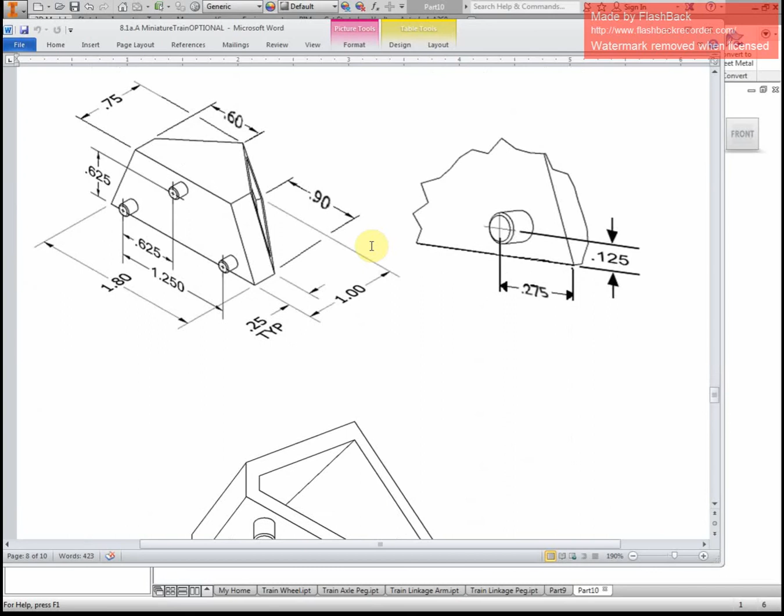Today I'm going to show you how to build the cow catcher for the miniature train. This one, notice there's 5 pictures with this. There's a lot going on, a lot of different dimensions, and sometimes I have to scroll from one picture to another just to figure out one general shape and find all of its dimensions.

Every so often they'll say something like this, 0.25 typical. That just means it's the same on both sides. Everything that looks like it's right there is right there, or anything that looks like it's 0.25 is the 0.25. Same thing down here, 0.10 typical. That means all of it all the way around is a tenth of an inch thick.

Diameter of 0.125, that's for this peg. Typical, but that means it's just the same for all 3 pegs.

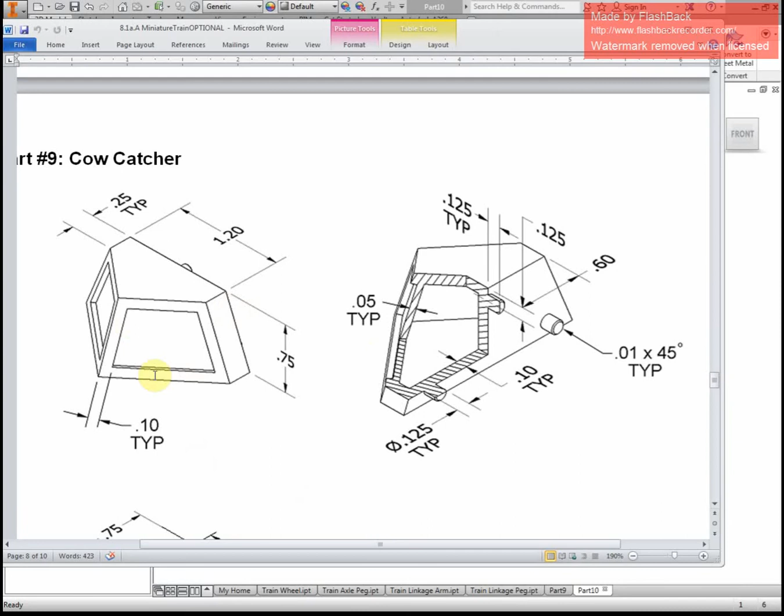The order you do the pieces here is important. So I'm going to build the overall shape first, then I'm going to shell it because I know it's hollow, and I'm going to delete the bottom face. After I do that, I'm going to put cutouts on the front on both those little sides, and then I'm going to put the pegs on the back.

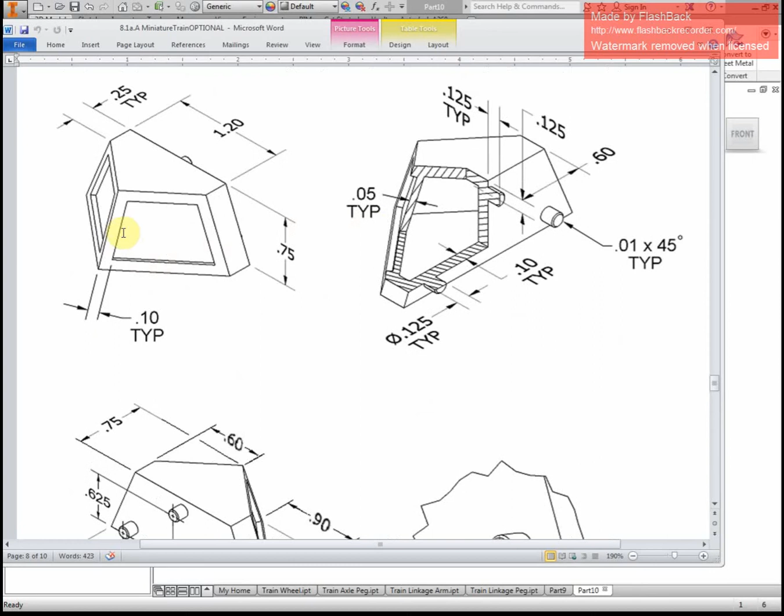If I do these little cutouts before I shell it, then I end up having those little cutouts pushed in right here when I shell. It ends up looking kind of funny. So make sure you shell it, then put these cutouts on.

Alright, let's get started. This one's going to take some time. So I'm going to start a sketch on this surface. I'm going to do my bottom piece first.

I'm going to go and do this larger bottom because the bottom and the top are different dimensions, though the backs are flat. So I'm going to do my bottom first, then I'm going to come and do my top using an offset work plane.

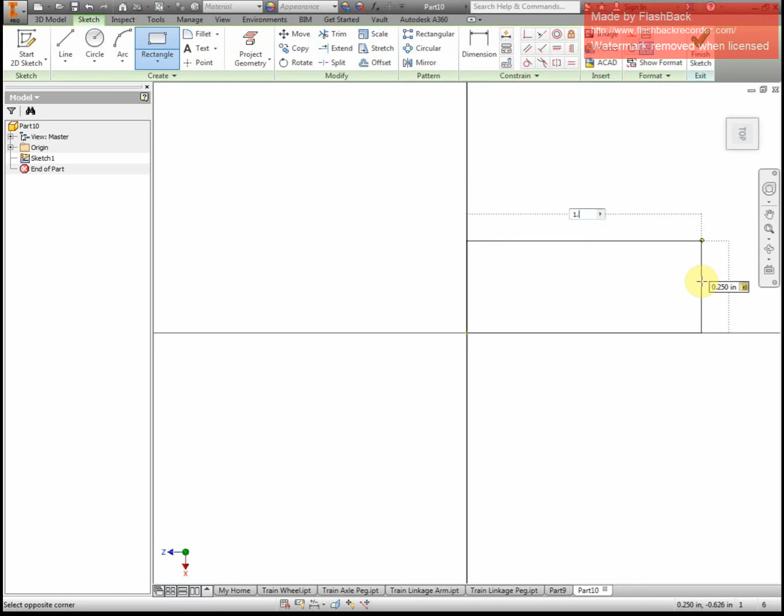My bottom, I've started a sketch already. I have to do a rectangle, do from here over. It is, with just the rectangle part, 0.25 by 1.80. Alright, so I have that piece.

From there I use lines and I come just kind of out. I'm just going to do a general shape, then dimension it so that it's the correct size from front to back. This piece here, make sure you're careful about what 2 things you're dimensioning between. So I'm only going from my peak back to my little rectangle piece here, and that one ends up being 0.75.

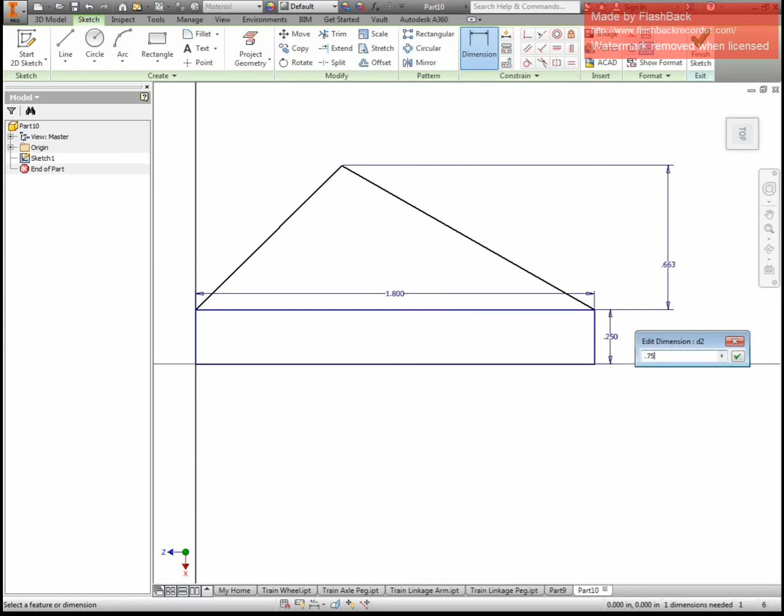So be careful how you build this. Make sure everything is dimensioned according to how you are doing it. You might do it differently than me, and that's fine. Just make sure your dimensions are coming in correct. Otherwise you end up with some weird stuff and you end up not being able to do those cutouts on the front. And this should be 0.9 because it's in the middle.

Alright, so this sketch, this one here, is done. I'm facing the wrong way, but that's not a big deal. So now I'm going to have to do an offset plane, and I can't see any planes. I don't have any shapes yet.

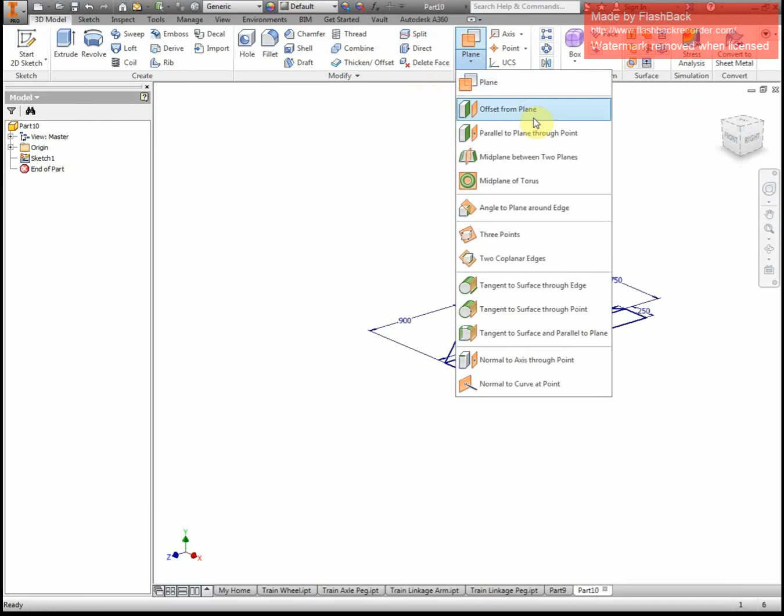So I'm going to open up my origin folder, and I'm going to find the plane that this sketch is drawn on. It was my XZ. So now I need to do offset of that, and that is by its height, which according to my little picture here is 0.75. So that's the height now of my overall structure.

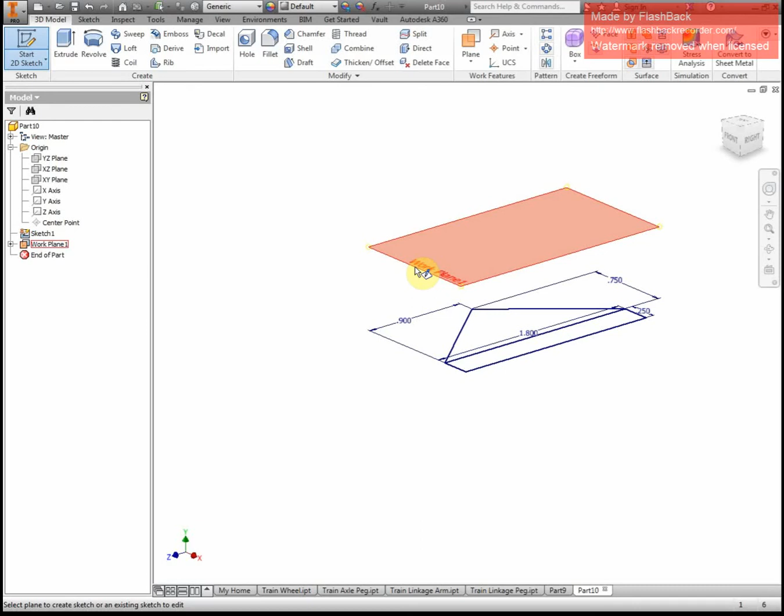I need to start a sketch up there. Alright, now I need to do the same thing. I'm starting on this back wall, so I'm going to start there so it's similar, and I come forward the same amount. I am 0.25 forward, and I am, in this case, 1.20 wide.

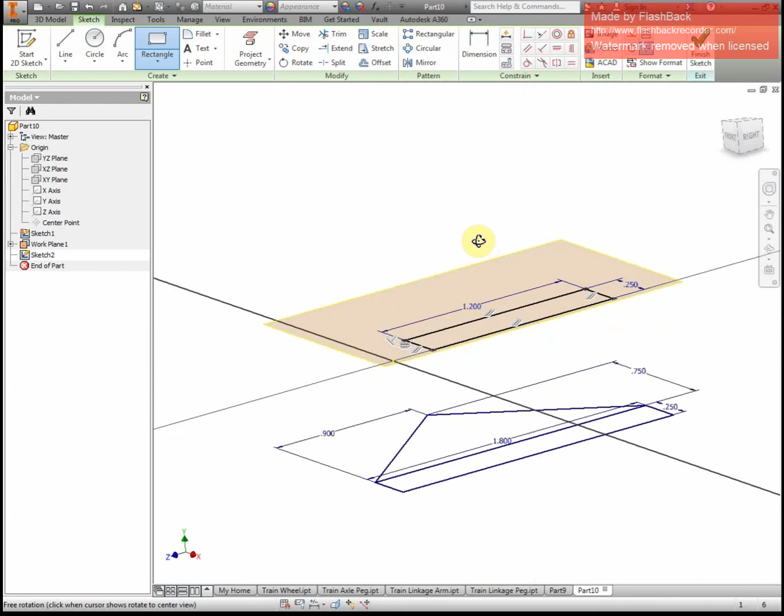Now everything else is going to be based off of this, my top one. Notice, if I rotate a little bit here, they are different sketches. I have one up here, and I have one down here. That's important. But I want to make sure that this top piece is centered over that bottom piece. I'm going to project geometry of this bottom box, so I can put my top piece centered over my bottom piece.

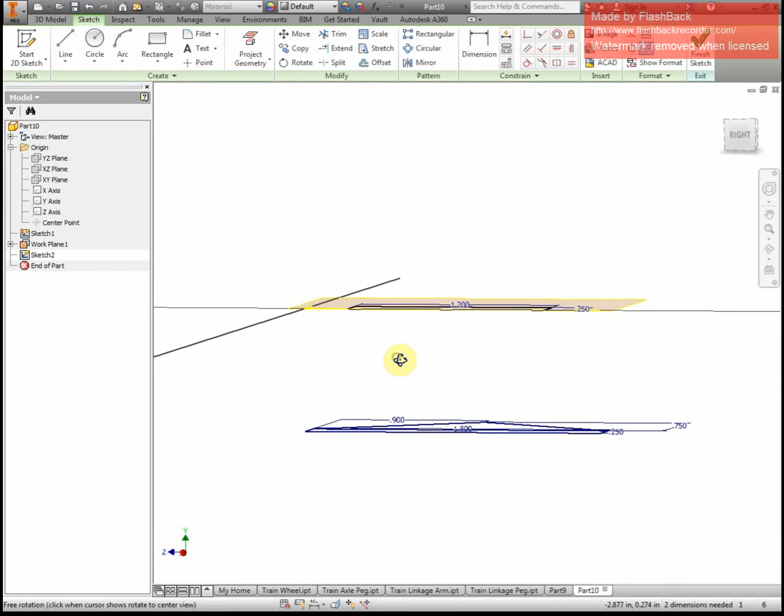Okay, so this corner here matches up with this bottom corner here. So I'm going to dimension to that one. That way my top is correct over my bottom, and then I can forget about the bottom. So I'm going to dimension this side to this side, and I'm going to subtract my overall width of my top from my overall width of my bottom.

So that's 1.8 minus 1.2. Again, that's overall width of my bottom minus overall width of my top. I'm going to go back and wrap that up in parentheses so that I can divide it by 2. That puts it smack dab in the middle. Let's see where it moves to.

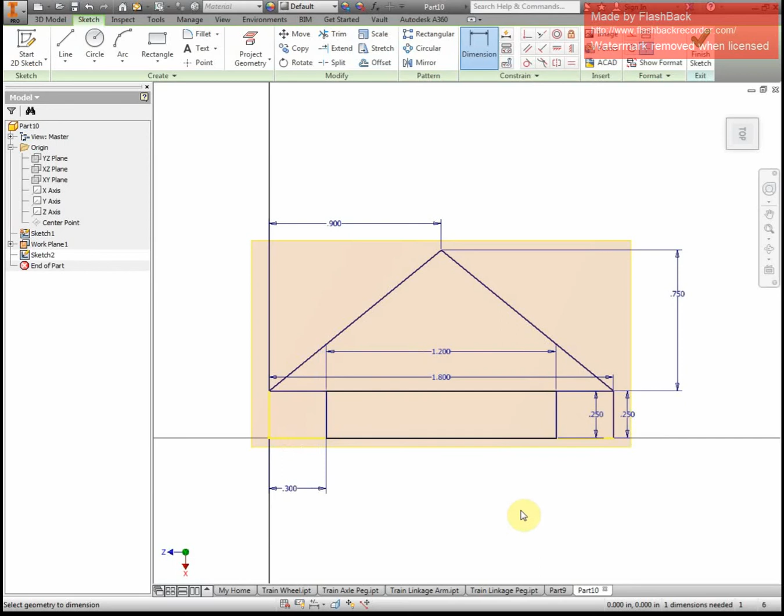Okay, so now I'll click right here, and we'll rotate just a little bit. This top rectangle is exactly in the middle over my bottom rectangle. That's important, so now I can just base everything off my top.

Let's build lines from this corner out again, just like the bottom. They're very similar shapes. And then I'm going to dimension from the center point back. That is 0.5.

From this point over, and that is 0.6. Again, careful how you do this. A lot of people might say that this number here, instead of being 0.5, is 0.75.

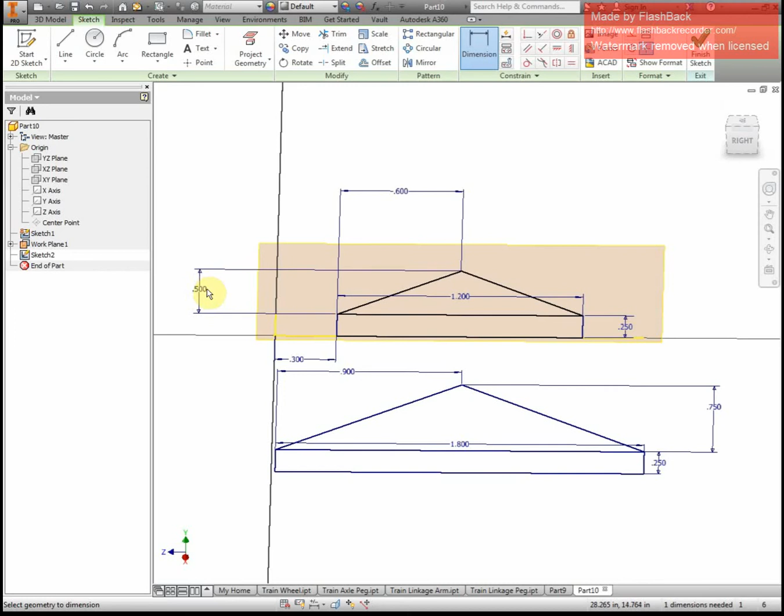Let me show you why. If I bring this over, the overall from the front to the back of the top smaller shape is 0.75, as you'll notice right here. But that's not how I dimensioned it. I did it from the front peak all the way back to where that rectangle started.

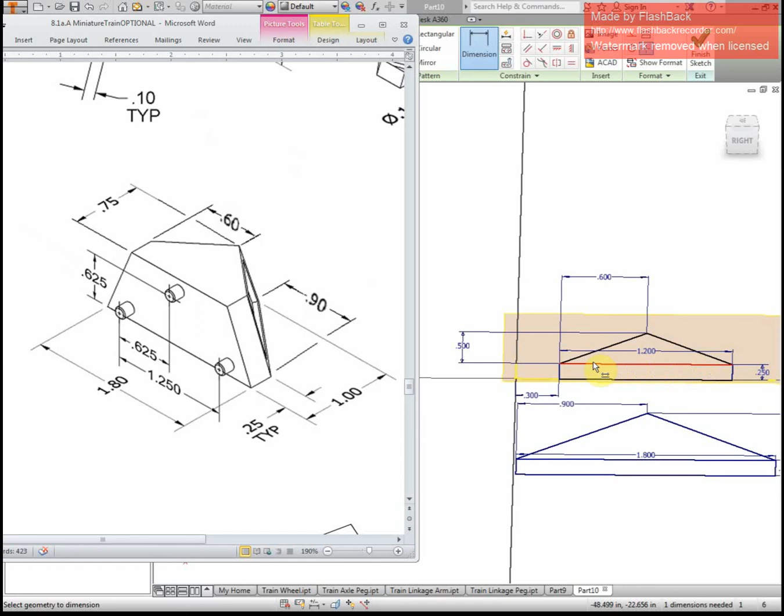So if I do that, I have to subtract out what that rectangle is, and that dimension is found up here. So it's my overall top, which is 0.75, minus the part I've already done. So I'm left with a 0.5. That's why some of my numbers aren't necessarily on that paper.

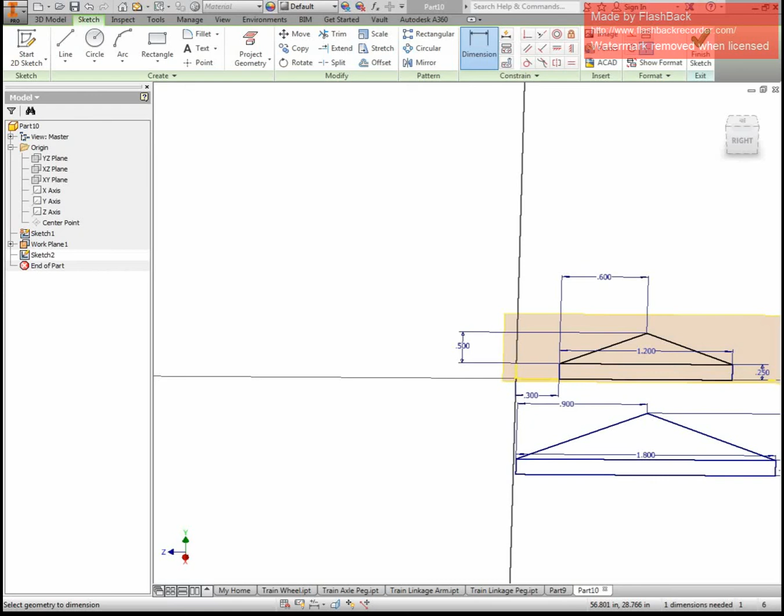So just keep that in mind as you're going through. It's not wrong if you build it a little bit differently or if you dimension from different things. Just making sure you're aware that mine might look different from yours, at least number-wise.

Now I'm going to finish both these sketches. Go back to my home view. Now I'm going to loft. That's how I go from one sketch up to another. So I'm going to highlight this bottom piece, and then I want both of them. And I'm going to click to add another sketch, to this top one up here. And then hit OK.

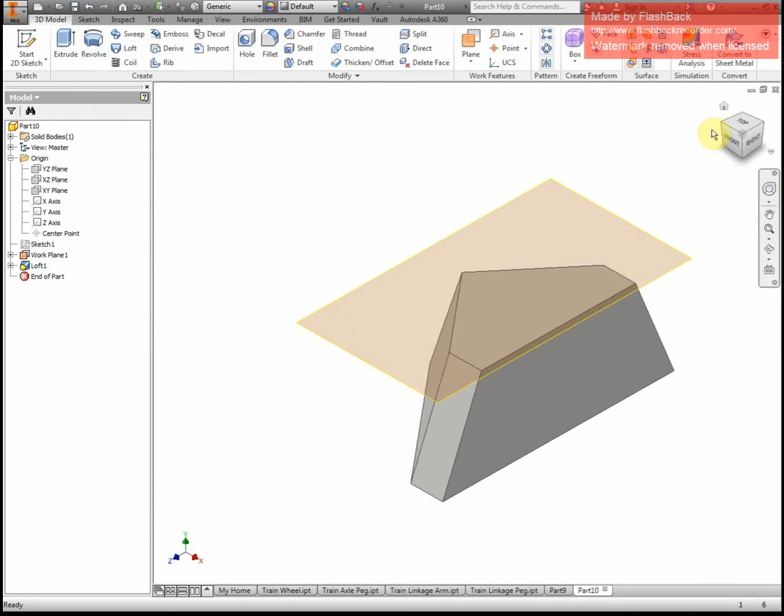Alright, I'm going to rotate this around so it looks a little bit prettier. And I'm going to right-click and uncheck visibility on that work plane. Now look at that. That's a good, healthy start.

This shape right here with that. Nice. If you end up doing this wrong, you won't be able to draw on this face here or on this face. So if you have any issue with that in the future, that is why. The top isn't directly over the bottom.

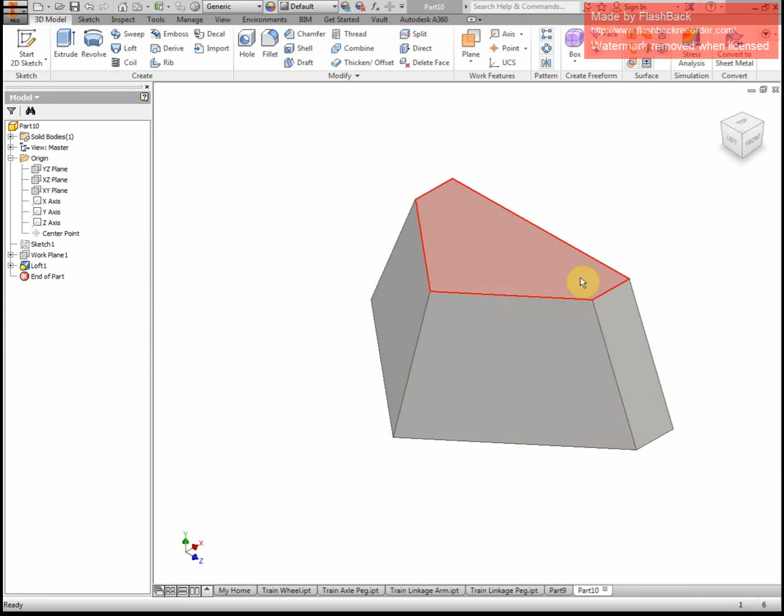You end up with kind of a warped face, and it's not going to let you create a sketch there. So let's do a real quick test. Try to make a sketch on there, and it squares up. That's good. That means nothing is out of whack here.

I finished that, and I'm just going to delete that off to the left. I don't like unused sketches in there.

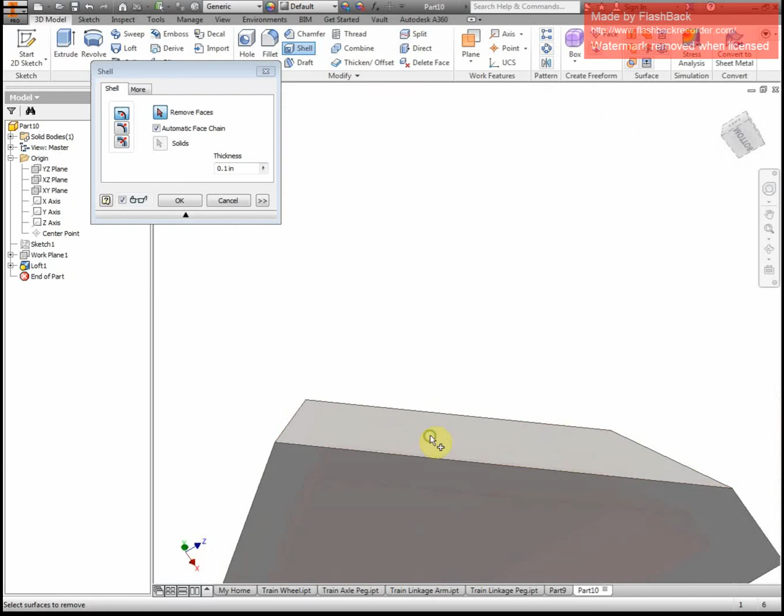And I'm going to scroll to the bottom of it, and I'm going to click on this face. That deletes it, and then hit OK. So you'll notice now I have a hollow shape that has no bottom to it.

Alright, I'm going to rotate this around so it's always the correct front. This is what I want to be home. Set current view as home. And fit to view. Instead of this being left, I want it to be front. So set current view as front.

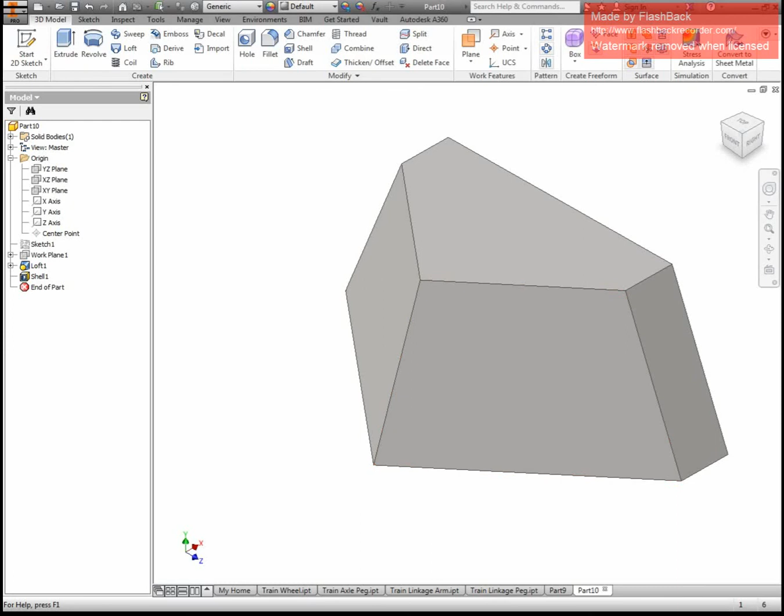Alright, so again, we are hollow. Our bottom face is deleted. Now, let's go ahead and put these front pieces on right here.

So I'm going to do this a little interestingly. It's very quick this way. I'm going to start a sketch on this side. I square up to just that one. I'm going to project geometry, and I'm going to select this face. Notice now it's yellow. The yellow means that I have traced that shape right there. Now I'm going to do offset.

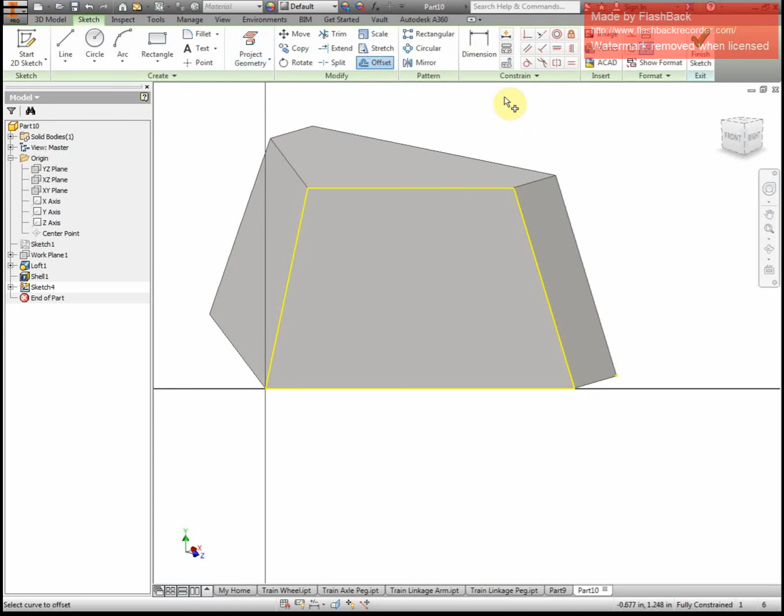We've talked about this tool before in class, but this is interesting. I'll click on that yellow edge, and I'll creep in. Notice the number, how it gets larger as my shape actually gets smaller. That's actually the thickness between my inside and my outside shape.

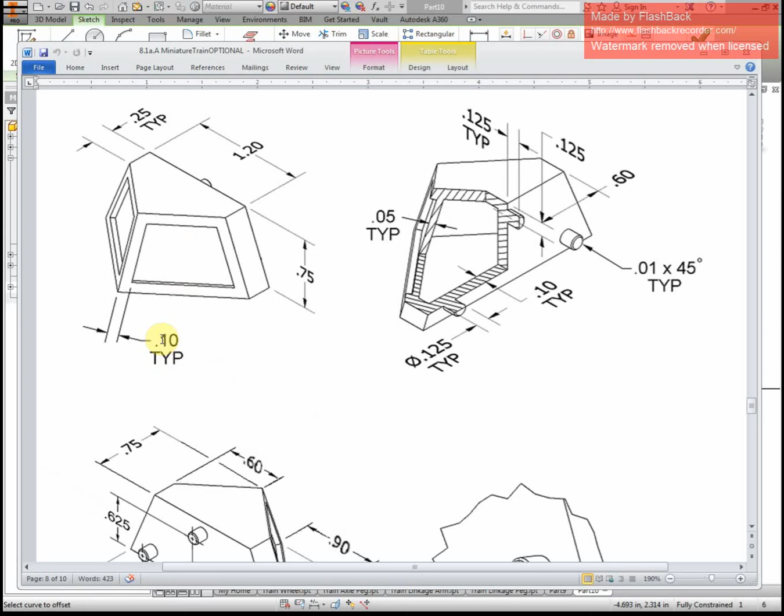I want it to be 0.1. Hit enter, and look at that. That is perfect. It is just inside that, and it is 0.1 all the way around. I know it's supposed to be 0.1 because of this picture here. It is 0.1 typical, which means 0.1 all the way around this edge.

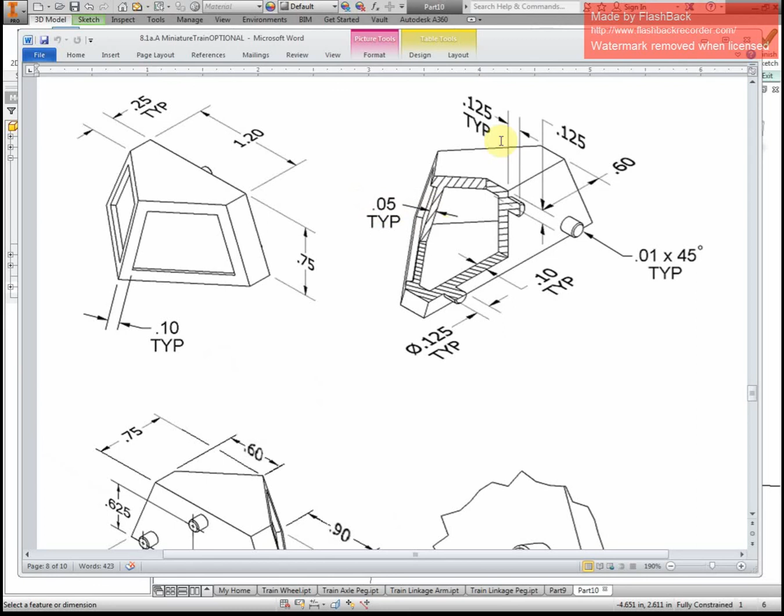And now I can extrude just this inner face. I want it to be a cut. I don't want it to go all the way through like this. I just want it to go in, how far? Oh, this is on this picture right here. It is 0.05. That's how far in that little piece goes.

Alright, you can see at the bottom here I have a small edge. I'm going to do the same thing on the other side, right here. So I'm going to start a sketch over there. Project geometry. Offset. And come in 0.1, extrude it,

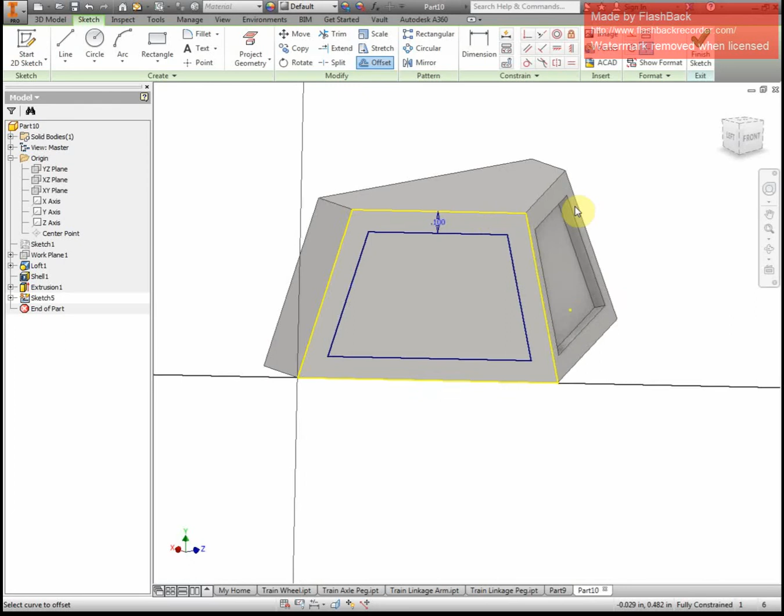and it has defaulted, so now I just have to select which one. Notice right now it's popping out. I want it to cut in. Hit OK.

Alright, and I think that's a good looking shape right there, if I don't say so myself. Again, we're shelled out of the bottom. If I were to shell out last, that cut that's out on this side, just like it is here, would be popped in, because even though it's notched in a little bit, it would still want to have a thickness of 0.1 all the way around. So that's where some of you might end up with some weird shapes in there.

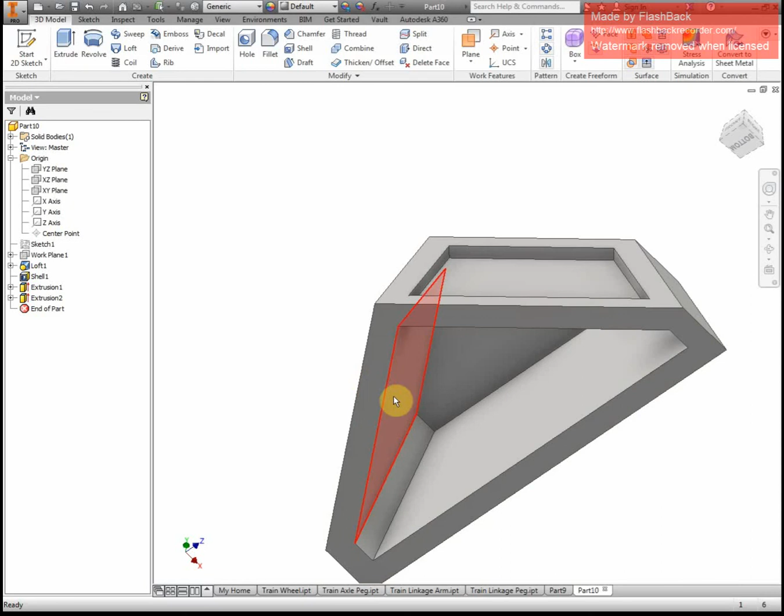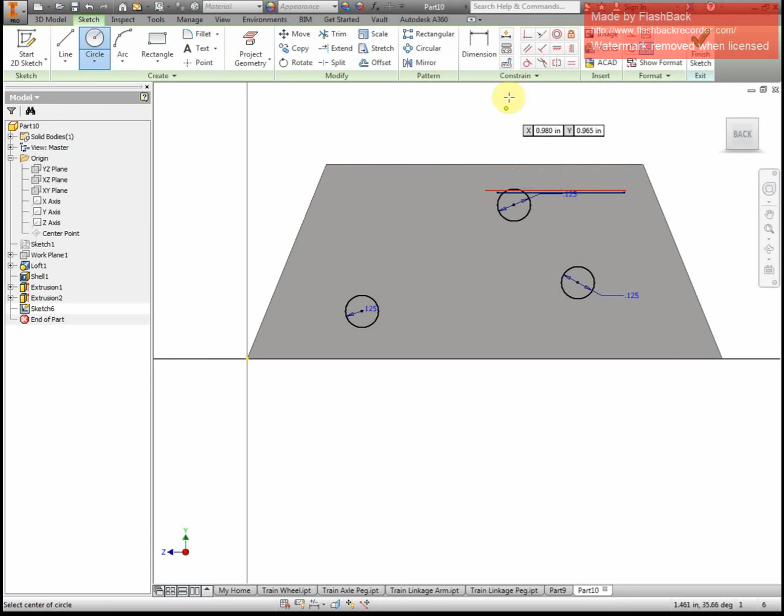Alright, now I have to do the pegs on the back. So I'm going to start a sketch on my back side. I am going to start off by putting circles. Let's do general circles here. They have diameters of 0.125. I'm going to do another one over here, 0.125, and then there's one up here, 0.125. Again, I just did general circles all over the place because now I'm going to dimension them.

This one, my height is 0.125. My distance from this edge, right here, that corner, is 0.275. And then I know the distance between this one and this one. Do it like it's chain dimensioning there down at the bottom. I know that is 1.25, and it is the same height, 0.125. And then this one, gotta figure out how tall he is.

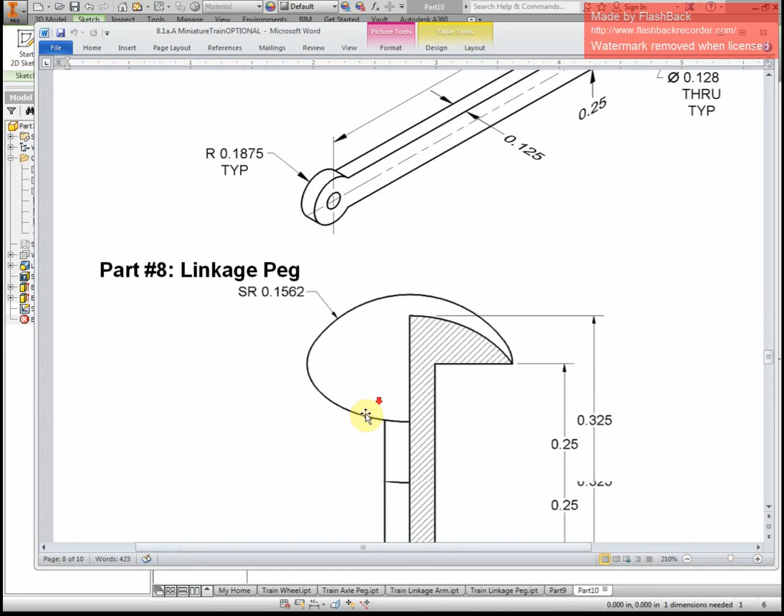He is 0.625. Now, careful here too. This is where it's important to know where things are dimensioned from. Let's scroll down here, right here. So this top hole, or sorry, this top peg, it's telling you how far it is away from this edge, from this one here. That's the important part to note. So I'm dimensioning, and I need to go from here to the center of this other hole. And that one is 0.625.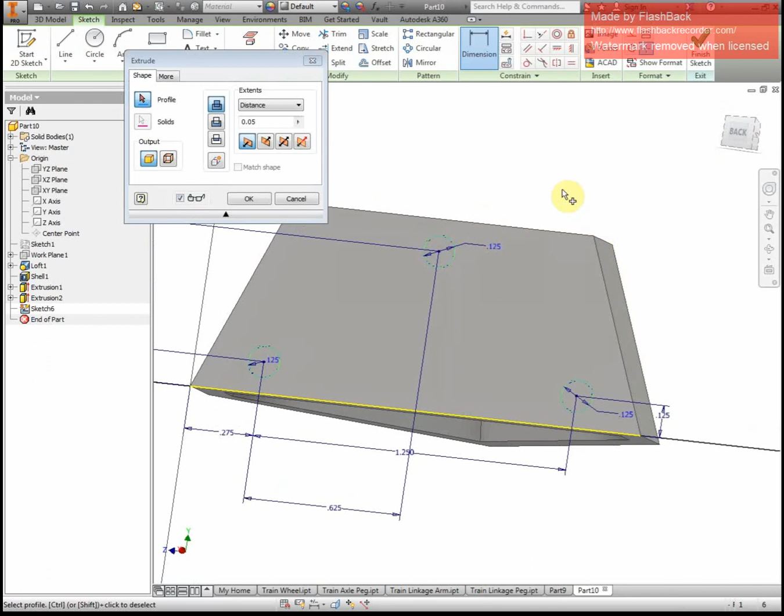Alright, beautiful. Now let's extrude them all at once. So I hit extrude, and then I'm going to click on all of them. And they need to come out 0.125. There are all my pegs.

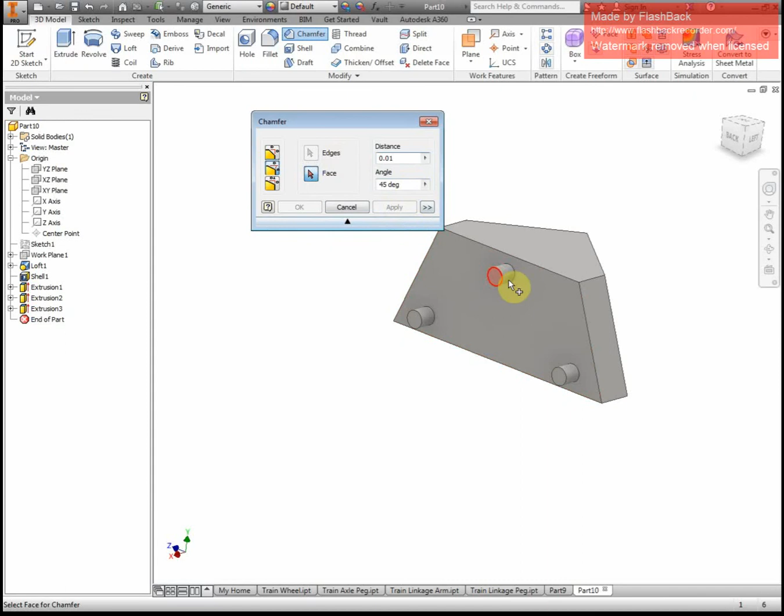Looking good. Now I have to put a small chamfer on them. I'm going to pick this one here. I need to be 0.01 with a 45-degree angle. I need to pick faces, this one and that edge. And then I have to do that for the rest of them. This one and that edge.

This one, oh, I have to chamfer again. This one and that edge. That put a small chamfer on there. That'll just make it easier when I try to put that into the train body in the future.

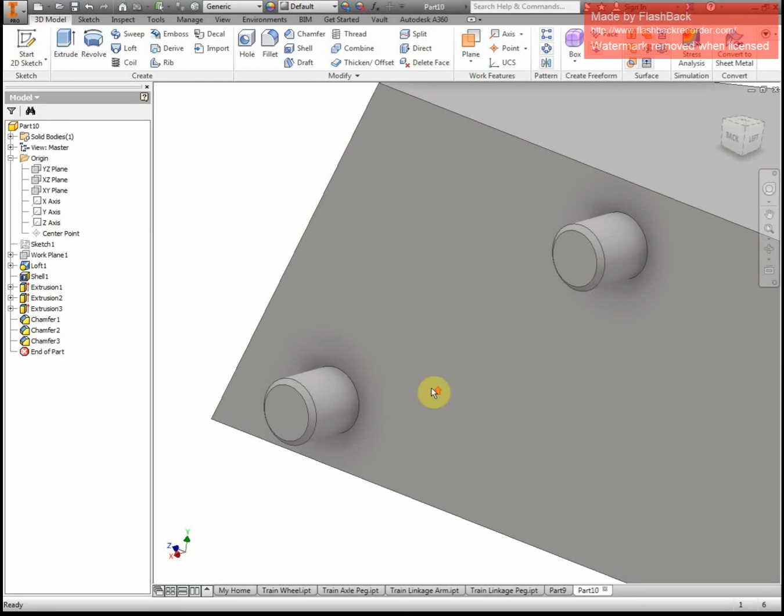Okay, so that's the back. That's the bottom. You can see it has a hole cut out. And that's the front. Let's go over and take a better look at the front. Alright, that is the cow catcher, folks.